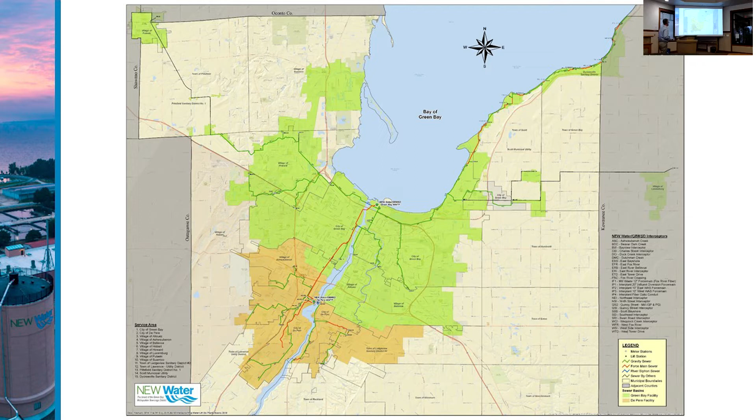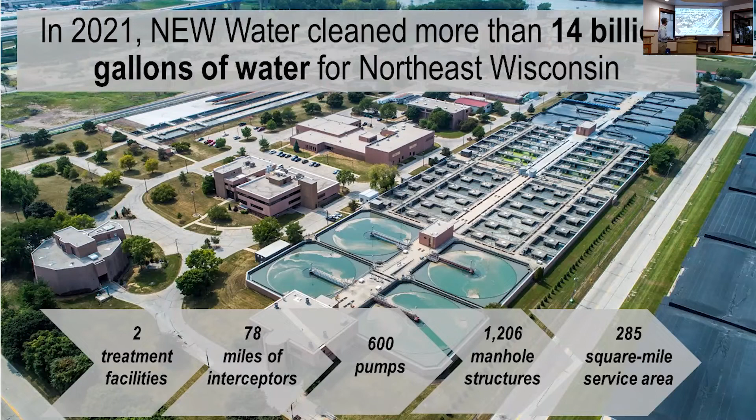We've been serving this community since 1931, and we do so around the clock, 24/7, 365, at these two facilities, so that you all can run your businesses, do your laundry, use the restroom whenever needed. In 2021, we treated 14 billion gallons of wastewater between the two facilities.

In addition to the two treatment facilities, we own 78 miles of interceptor pipes—the big pipes that collect wastewater across our region—along with lift stations and pumps across that service area. This is an aerial view of the Green Bay facility, which is located near Bay Beach Amusement Park, discharging out to the mouth of the bay, the Fox River, and into the bay. The De Pere facility is located near Brown County Fairgrounds.

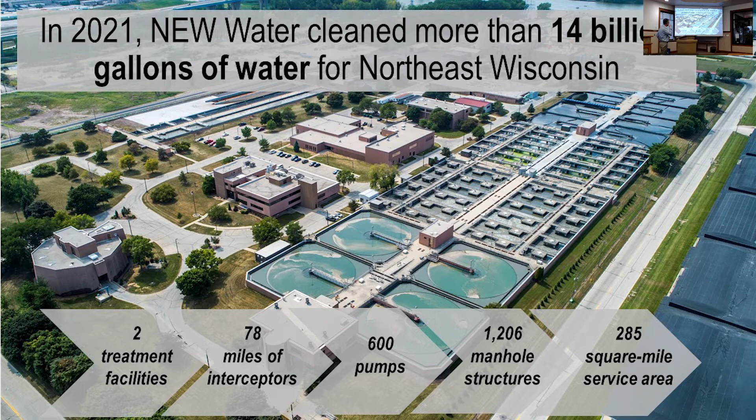And we do this protecting our most valuable resource, water. This is the vision for the organization that keeps us moving forward and advancing within our industry. NEW Water is regulated by the Wisconsin Department of Natural Resources. In 2021, we celebrated 19 straight years of 100% permit compliance at our Green Bay facility. That's something we are very proud of, and we try to do so efficiently and cost effectively. We feel that reliability, our service, reliable any day, is an important piece of supporting economic development.

As we take a look at a planning effort like this, we think about the expectations of our customers and residents. Supporting growth and economic vitality of our community is incredibly important. We do not want to become a barrier to growth. We may not be the reason why people come to Green Bay, but we don't want to be the reason that they don't come. We are here to protect public health and the environment.

We focus on 100% permit compliance. We have a permit with the DNR, as I mentioned, and we also have an air permit for our facilities, and we focus on that 100% permit compliance. Providing reliable and cost-effective conveyance of wastewater is an expectation we feel you all have and our municipal customers have.

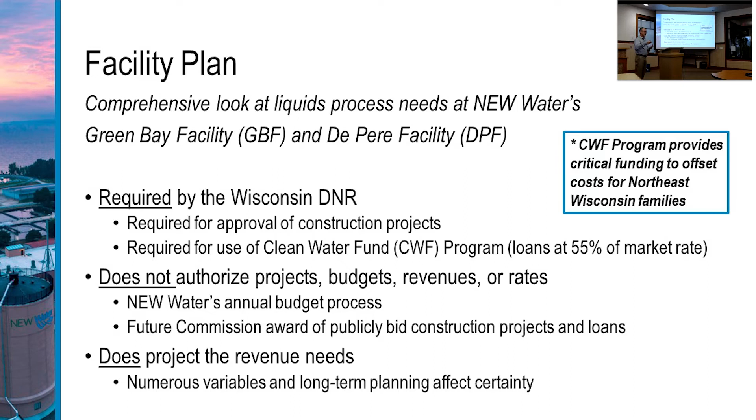What this doesn't do is it does not authorize any specific projects. It doesn't approve any budgets, any revenues, or rates. That will still be done through our annual budgeting process and future commission action on those budgets and award of any publicly bid construction projects as we move through implementing this plan. It does project the revenue needs. It projects the particular projects we need and what funding and revenue needs it will take in order to implement them.

So what's the process? What do we do when we talk about performing one of these facility plans? It starts with understanding the issues. What is the current wastewater flow rates and contaminant loadings to the two treatment facilities? What does that look like in the future?

We work with Department of Administration growth projections for our region. We work with Brown County Planning to understand what the future demands of our wastewater treatment facilities are. We perform condition assessments and capacity assessments of those facilities to understand, can we move that much wastewater through the facility? Is this breaking down? Is this piece of equipment breaking down? Does it need investment to keep it reliably operating? So that's where we start, in understanding, taking a deep dive into our facilities.

Then we begin developing solutions. How might we package these infrastructure projects to achieve the goal of meeting those future flows and loads, taking a look at different solutions, maybe comparing alternatives. We could do a project that potentially replaces a whole headworks building, or can we fit within the existing building? We evaluate those alternatives across the gaps that we've identified.

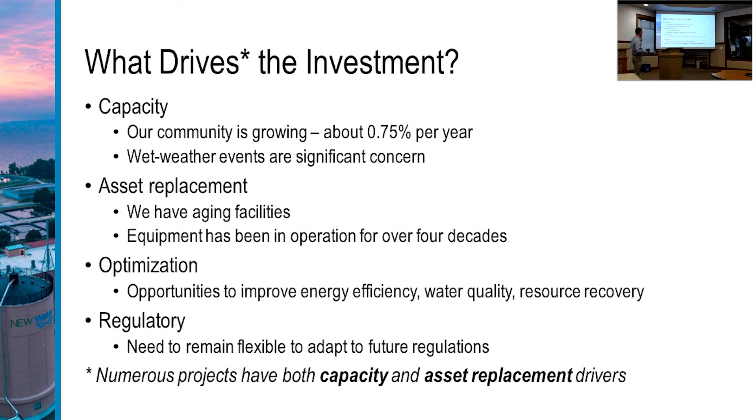On the regulatory side, while all projects are connected to meeting our permit and regulatory requirements, there's not a new regulatory driver necessarily pushing any one of these projects forward, and no new limit coming into effect yet. We are seeing reductions in our suspended solids and phosphorus limits, and we just got a new permit in April that ratcheted those down. So we need to continue to improve effluent quality and performance of the systems.

So, talked about wet weather. These are really bad days, not just for people trying to get home with water in the streets, being rerouted, and damage to their personal property from flooding, but also these peak flow capacities that occur at our facility. In this community we have a separate sewer system, separate sewers for stormwater and for sanitary wastewater. Despite that, we still get rainwater and snowmelt coming into our systems - that's called inflow and infiltration. Inflow being a fast source of water, infiltration happening slower as groundwater seeps through the buried infrastructure. This is a significant concern for our utility.

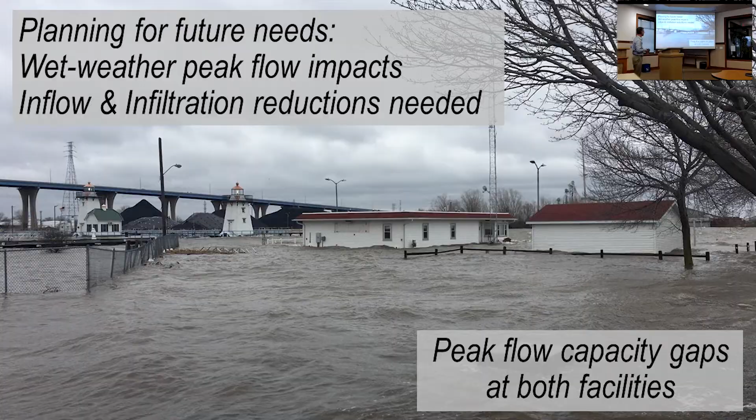At our 2 pump stations combined with the 2 wastewater treatment facilities, we have a rated capacity of 161 million gallons a day - about 120 at the Green Bay facility and about 40 at the De Pere facility. These aren't theoretical numbers, these happened. We exceeded or basically met these capacities during some past wet weather events, and more storms will continue to happen that produce results like this. So we need to improve the rated capacity of our facilities.

Here's an example, back in December of 2015 and March of 2019. This is the flow rate at our De Pere facility - you see it climbing during snowmelt, and then we got significant snowmelt and rain on top of it. This red line is the rated capacity: with one pump out of service for maintenance we can pump 40 million gallons a day, with all pumps available we can pump 50 million gallons a day. We were able to do that because we had all our equipment available, and it exceeded that rated capacity for about 18 hours.

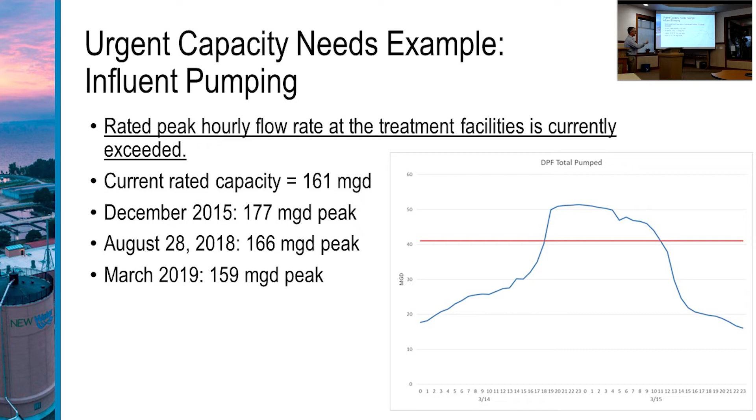So these are significant events that we are not always prepared for, because equipment takes maintenance, and especially when that equipment is 40 to 45 years old, breakdowns happen more often. It takes longer to rebuild this equipment. This is a significant concern that this facility plan helped us identify solutions to address.

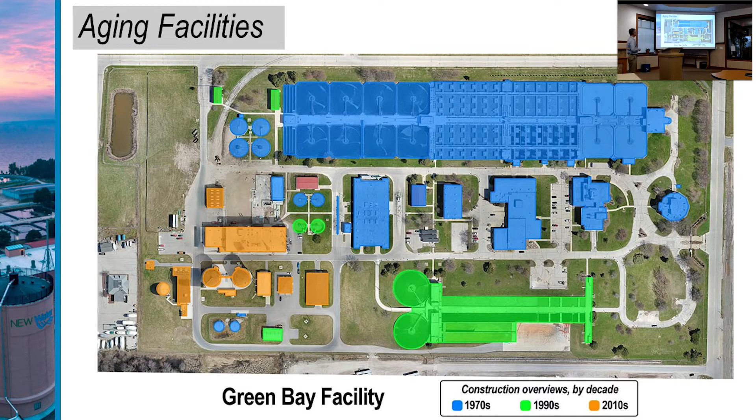Generally, on aging infrastructure - here's an aerial view of the Green Bay facility. The blue area was constructed and started up in the mid-1970s. We had some improvement in the 90s and recent improvement in the 2010s with our solids portion of the facility, but this blue area is the primary area where this facility plan has identified a lot of gaps, in operation now for many decades since startup in the 70s. Similarly, at the De Pere facility, the blue area was from the early 1980s - I think 82 it went into service - so there's a lot of aging infrastructure in those areas, and that pump station as well.

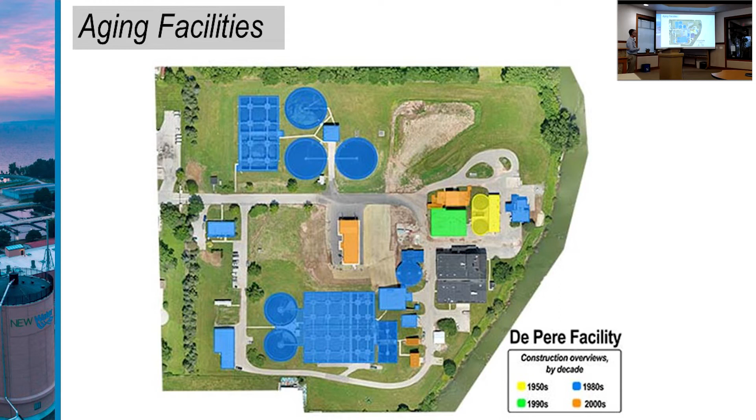So on that aging infrastructure, here's an example. This is what's called a primary clarifier at the Green Bay facility - one of four primary clarifiers. They're running 24/7, 365, unless there's a breakdown. We always have one of these in service. Here's one that's taken out of service because we had thinning metal and a failure of the support structure on the center column of that clarifier. We see similar conditions and breakdowns across the primary clarifiers as well as the final clarifiers.

The concrete's in decent shape, some staining and some rehabilitation needed, but this basin will continue to serve for decades in the future. But all the structural steel, the weirs, and the rotating equipment sit in a gritty, corrosive environment running 24/7, 365. We need to begin taking these out of service and do a complete replacement of all these internal mechanisms. That's a pretty big piece of the investment across both facilities - working on these clarifier projects. So I just wanted to run through one of those for some context. What does that mean when it ages?

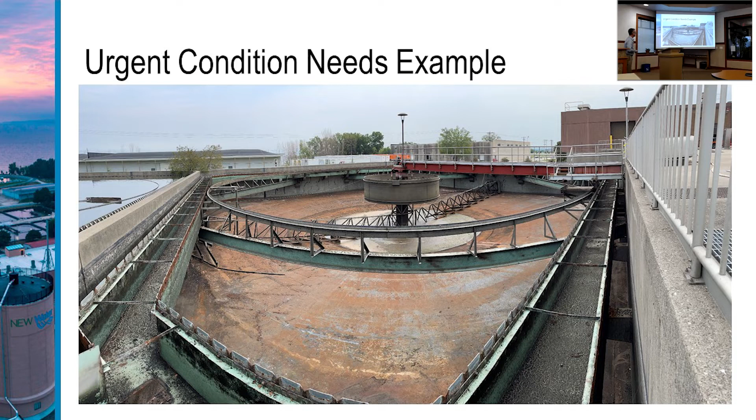The Green Bay facility, a different look at the aerial view, showing the projects we've identified to occur over the next 20 years. We see it across the liquids processes of the facilities, pump station improvements, and the new solids facility, primarily taken care of with the improvements we did in the 2010s.

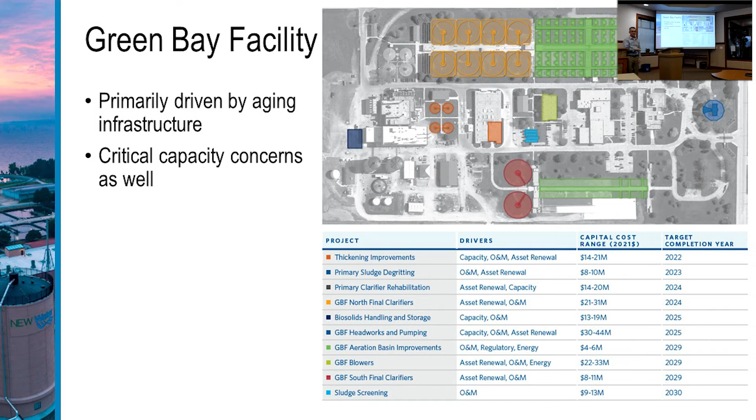But the focus of the projects here - our website does have a one-page summary for each of these identified projects. You can go there if you wish. There's a plan about our facility plan where you can learn more, why the clarifiers, why the aeration basins, and you can read through that. I'm happy afterwards to answer any questions related to that.

Similarly, at the De Pere facility, it's a bit more capacity driven. We will be looking at adding most likely a fourth clarifier that's been identified as a future project, as well as an additional aeration basin. There's some organic loading, some pollutant loadings that are increasing and starting to push the capacity there, as well as aging infrastructure and wet weather peak capacity.

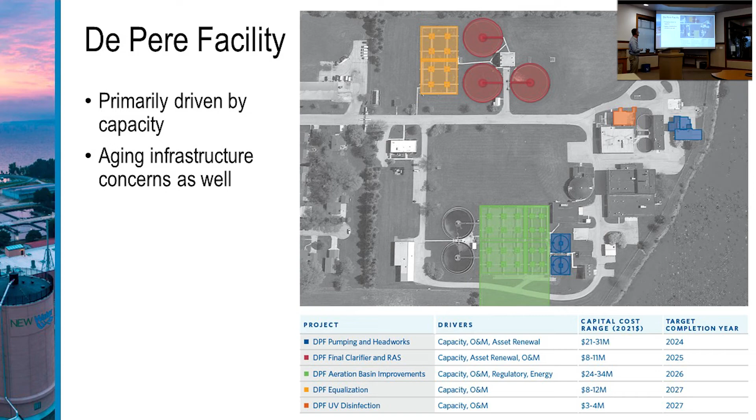So not to forget about the pipes, right? We've got to be able to get the wastewater there. This particular project didn't really dive deep into the interceptors, but we know it's an important piece of the funding, so you'll see that we've included the cost in the long-term outlook.

We did a master plan, like a facility plan, for our interceptors back in 2014 that did something similar. It identified the next 20 years of projects on the interceptor side. We blended the facility, the wastewater treatment facilities planning with the interceptor planning to try to give a holistic look on what the future funding needs are for the utility.

The main conclusions from the facility plan: first and foremost, we wanted to take a look at whether the De Pere facility made sense to stay operational, or should we turn that into a pump station and just treat all of that wastewater at the Green Bay facility. That was a pretty easy capital decision as we started to take a look at some scenarios - it is much more cost effective to treat that wastewater at the De Pere facility and keep that operational.

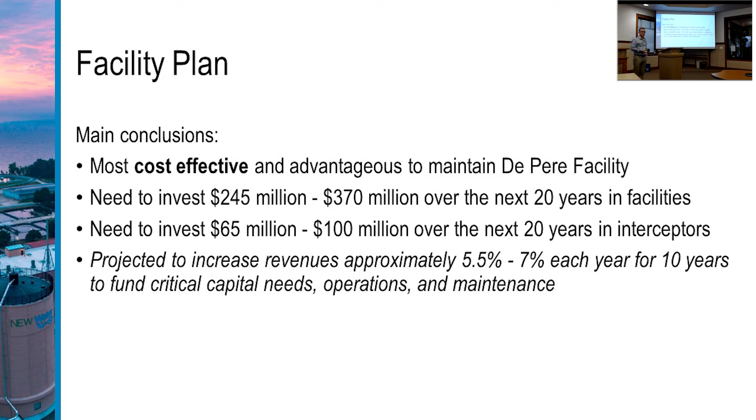Those are really big numbers, hard to grasp. What does that mean? It takes over a long period of time. What does that mean to our municipal customers? In general, we are projecting 5.5% to 7% revenue increases each year for the next 10 years. That will fund those increasing capital needs that we've identified, as well as the operations and maintenance projections that we're making to operate the utility.

Just briefly, how it breaks down between the facilities: 180 to 270 million at Green Bay, 65 to 100 at the De Pere facility. Bringing that total between the two treatment plants and the interceptors, 310 to 470 million dollars over that 20-year period.

We've identified, as any facility plan will do, some things that should be on our radar. We don't believe they fall into that 20-year planning window, but what are some of the things that could happen? We make assumptions about how to plan, but what might we need to adapt for? Maybe a new nitrogen limit is required by the EPA or the Department of Natural Resources, so we've identified a project there. These aren't in that window of time or in those capital estimates, but we've done some planning around how we might approach them if they do occur. We would have to reprioritize and rethink what order of projects needs to happen.

Wanted to talk briefly about the tertiary filtration project at Green Bay. We are able to keep this project outside of this 20-year planning window because of the work we're doing out in agriculture primarily, and with urban stormwater in our adaptive management work. That is regulatory flexibility that the Department of Natural Resources has given New Water and utilities like us to make TSS, solids, and phosphorus reductions out in the environment, in agriculture, as well as stormwater, in order to get the water body into compliance.

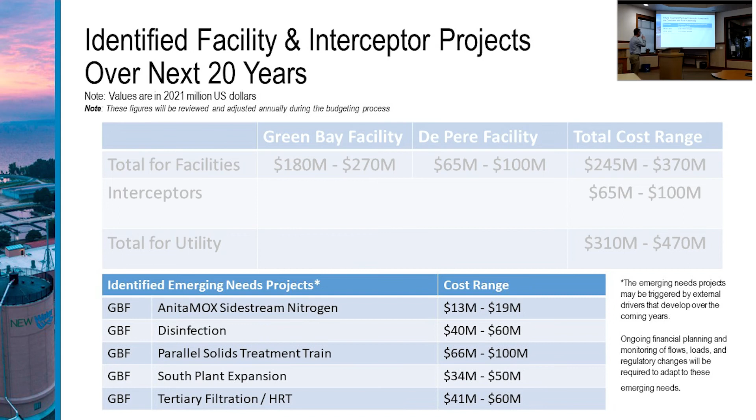So identifying what does that mean to the municipal customer? What does that mean to a homeowner? It's pretty complicated when we start talking about rates, because New Water has 5 rates. We bill our municipalities for flow, BOD, TSS, nitrogen, and phosphorus. So the ability to take a long-range planning project and say what does that mean for our future as a homeowner - it gets tough. We have to make some pretty broad assumptions, but we're starting with that basis of a 5.5% to 7% revenue increase.

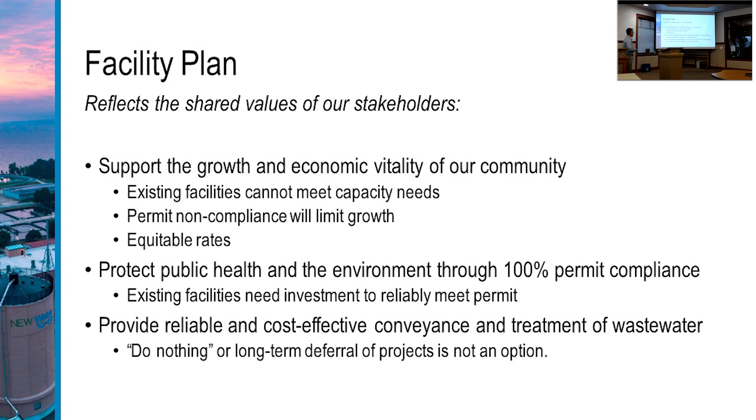Protecting public health and environmental health at 100% permit compliance is absolutely a driver for this planning project. Doing nothing, or long-term deferral of projects, is not an option. These pieces of equipment have been operational a long time. We're growing, we're having more breakdowns than normal, and they take a long time to recover from. So certainly we need to make these investments.

So next steps, we're here today with our second public information meeting. We're going to evaluate whether we want to do any further public information meetings like these. Eventually we'll get to three key milestones. One will be a public hearing with our commission, likely to occur in June, in front of our commission. That would take public comment and an overview of the facility plan at that hearing.

Commission adoption of that facility plan is a formal action—they'll need to adopt that plan—and then DNR approval. That'll take a number of months for them to review this plan, make sure it's consistent with the requirements set out in regulations, and see that we're approaching these projects in a well thought out way. Ongoing after that, certainly annual budgeting and annual capital improvement development will continue, and we have regular updates to our website on this topic around the facility plan.

So I think we made it through the formal piece, and I'm interested to hear what kind of input, what kind of questions you may have.